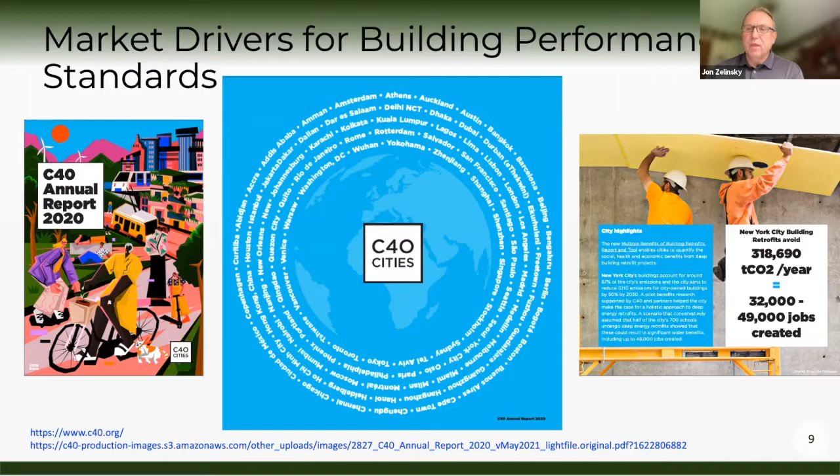So we start talking a little bit more about the market drivers. If you look at the percentage of carbon emissions from our building stock here in the US, on average 40% of all greenhouse gases that we generate here in the United States comes from our buildings. But that's the average. If you look and drill down a little bit more, you can see in most of these major cities that the carbon emissions is much higher.

New York City, 70% is attributed to their commercial and residential buildings. Washington, D.C., 75%, Boston, 60%, Philadelphia, 62%, even San Francisco, in California, which has some of the most stringent energy code for quite a while, is at 56%.

So the buildings that we work in, the types of systems that we design, are not basically energy efficient. In fact, according to the US EPA, 30% of the energy in our buildings is just pure waste. So moving forward, it's about how do you start to reduce that to meet the end goal of reducing carbon emissions. Next slide.

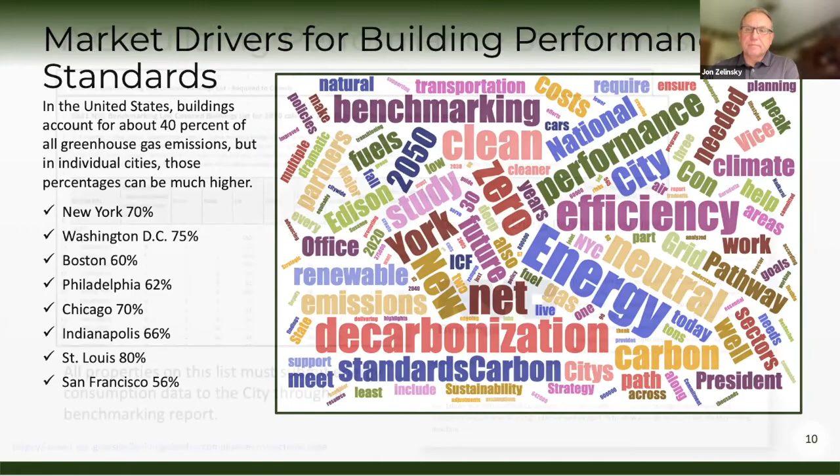So now we're going to talk a little bit here about the building emission standards. In New York City, they have a requirement now on the books where buildings greater than 25,000 square feet have to benchmark and report their energy consumption data. This is not about how much lighting or cooling they're using in the building. They have to report on an annual basis how much energy per square foot, getting into an energy usage intensity to understand what's happening.

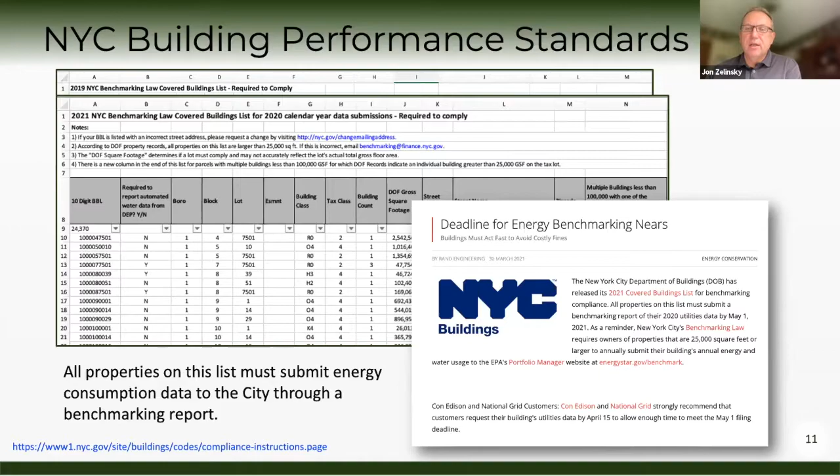And if you think about it, there are consequences to that, because in the world we live in today, this is kind of like public information, and with social media and everything else out there, non-compliance can actually come with a lot of operating risk, not only to your bottom line on your energy budget, but how do your customers feel about it? How does your board, your employees feel? What's really important is that having this public information can really damage somebody's reputation.

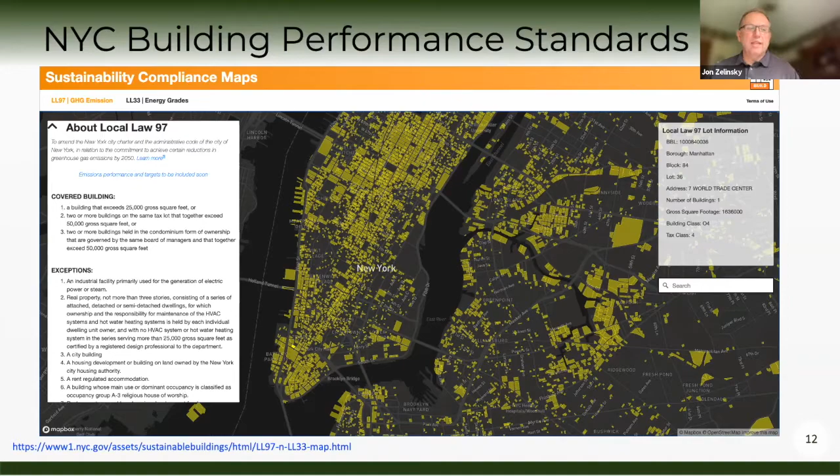Then beginning in 2030, that number reduces. Between now and 2050, which is the goal to get to an 80% reduction on the path to carbon neutrality, each one of these building owners is going to be required to reduce their overall energy consumption in their buildings. And it's not just the energy consumption, but where they get their energy from. If it's from renewables, fine, but anything emitting carbon emissions is going to be penalized.

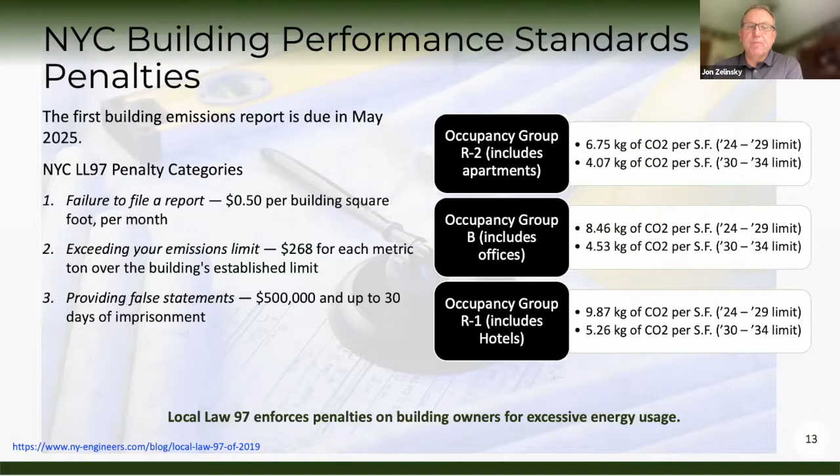Many of you are fully aware that lighting has become a reduced impact on energy consumption in a building. Most new lighting is now LEDs, exceeding 200 lumens per watt. With higher efficiency lighting, the overall percentage contributed to lighting in a building system has significantly reduced. It used to be 40% of a building's energy attributed to lighting, and that number is getting much smaller.

But the most significant, as you're probably aware, is the HVAC system. It's really cooling driven in that matter. But a lot of these buildings in places like New York and up north also have a lot of gas and oil heating and things like that, which are all measured and reported on.

Another area that is increasing significantly is plug load. When it comes to lighting, a lot of task lighting and things like that are now being put in these particular buildings, along with other things such as space heaters and everything else.

But why is it important that you are aware of this? It's because it has a real financial impact to the owner, not just in their operating cost, but with these building performance standards in place. Each one of these buildings is going to be on a fixed energy budget.

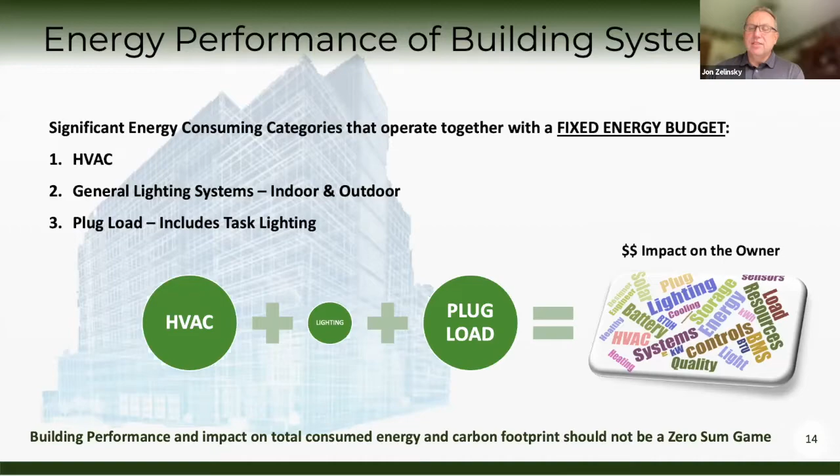But as we go to the next slide here, I'm going to give you some basic math. This is how a calculation is done when you're trying to figure out what your overall electric bill cost is. I'm not getting into details of distribution costs, just on a pure energy basis here.

What I use as an example here is a simple 12-watt downlight operating for 14 hours a day, 365 days a year, at 10 cents per kilowatt hour, uses 61.32 kilowatt hours per year. You can adjust that rate for whatever region of the country you're in. But at 10 cents, it costs that owner about $6.13 in energy consumption, which you might say is not very much.

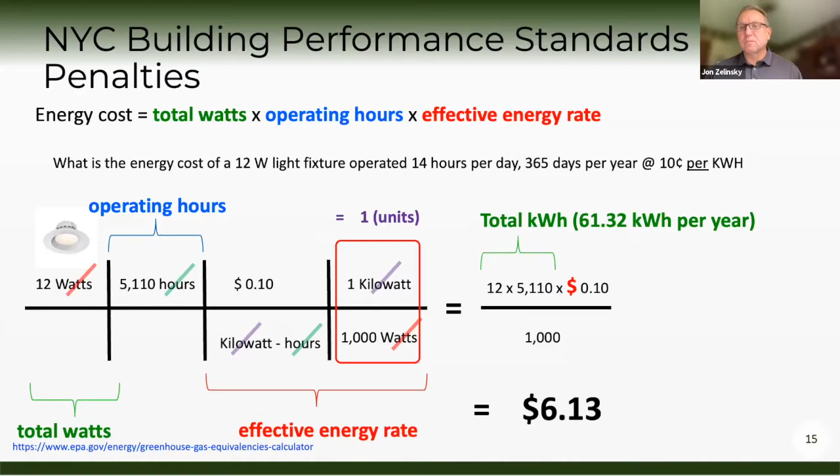But if you go to the next slide, now let's put that into context of carbon emissions. So 61.32 kilowatt hours of electricity in any given year equates to 0.043 metric tons. So how many of these light fixtures do you have in the space?

If the building owner is over their carbon emissions threshold, that individual light fixture can cost almost twice as much as the annual energy consumption of that particular fixture. So $6 to use in energy, and almost another $12 in financial penalties.

So by exceeding that particular limit, that's where having these buildings where you drive by and lights are on 24 hours a day, even when the building is not occupied, or spaces that are lit inappropriately because they're overlit, or there are too many fixtures, or there's no occupancy sensors, or someone has taped over a sensor or bypassed the controls, that's where these types of penalties now start to increase.

So up to twice as much a year is going to be hitting the owner's pocketbook just because of the contribution that lighting has. Now it might be the cooling system, it might be the plug load, it might be everything else that's throwing that particular building over that threshold. But to get to the true cost of what an owner is spending to operate that lighting system has a whole new complication to those calculations.

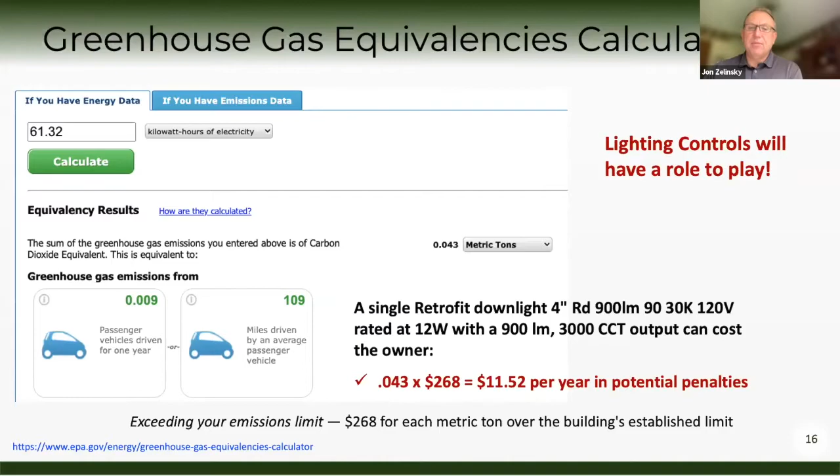So now let's start thinking about the building itself. I thought this was a good analogy because when I started my career as a consulting engineer, a lot of times the work you do in designs doesn't get noticed - because if you have good air quality and good light quality in a space, your occupants are happy. When occupants are happy, no one complains. They complain when there's something wrong with the lights, the air quality, when an office is stuffy, when things don't feel right. Having power over the types of designs really impacts a healthy building.

Especially with COVID, air quality has become front and center of what's supposed to happen in our buildings. Everyone's aware now that air quality has probably not been up to snuff in a lot of buildings. There's a lot of dining outside, we still haven't occupied a lot of buildings. You're talking about MERV filters and all these other things. The same conversations apply to lighting quality - circadian rhythms and everything else. Improving the overall environment of the building is critical for the health of occupants and the operations of the building.

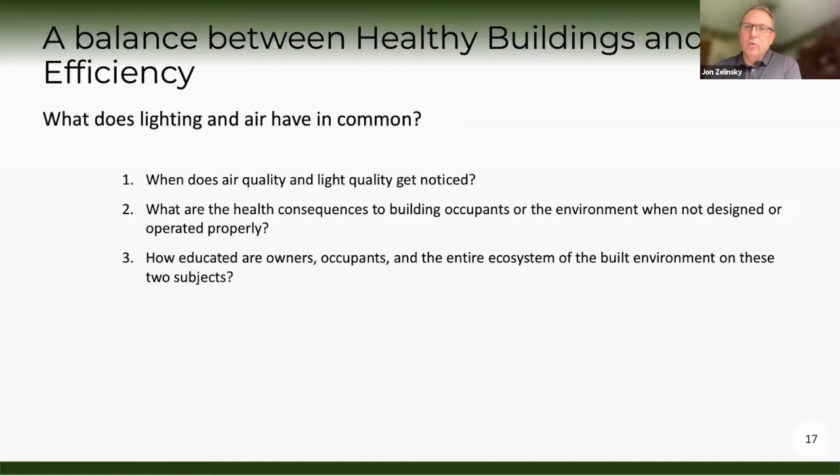Education is just lacking in our industry. And when it comes to building performance standards and what's on the table right now, that's where I think the lighting design community can have a voice.

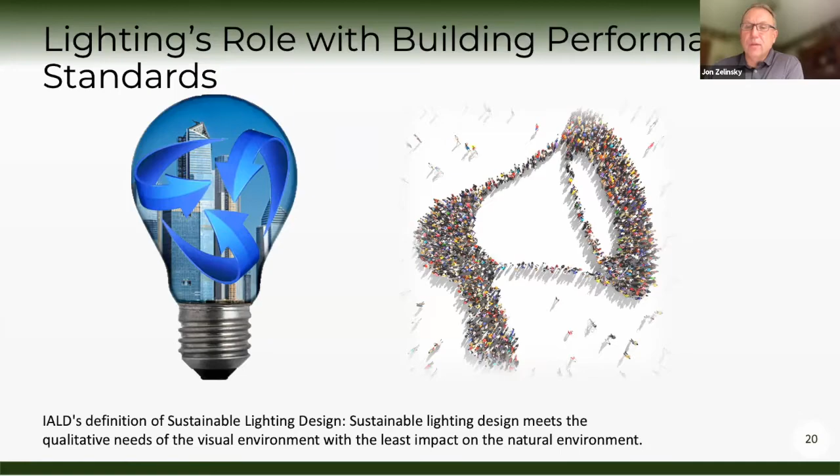So I took this slide from Konstantinos Papamichael. He's presented many times at IALD, and this is a combination of a couple of his slides that he used a couple of years ago when he was talking about code.

And in lighting, you want to have the right light at the right place and at the right time. I think that's even more important today moving forward than it was in the past, because having the right light, the right place at the right time, makes sure that you are energy efficient, that you are creating a healthy environment, and that the building occupant is doing exactly what they need to do in that given space. The only wild card in this is having the right light at the right time.

There might be a shift in how that building owner changes how they occupy that building, depending on the energy consumption requirements, whether you're using solar, battery powered, things like that. Because when it comes to lighting systems, I'll give you an example: if you have battery storage with renewable energy from solar and everything else, that battery storage is managing how that energy is being dispersed through that particular system.

So the lighting system is drawing a certain amount of power off of that particular device over a period of time. Being able to then manage and shift how power is consumed during those periods of the day is very important, and that's where lighting controls is really going to be important moving forward. It's not just a nice to have. I think it's going to be very essential to have lighting controls and those advanced data analytics to how that building performs over time.

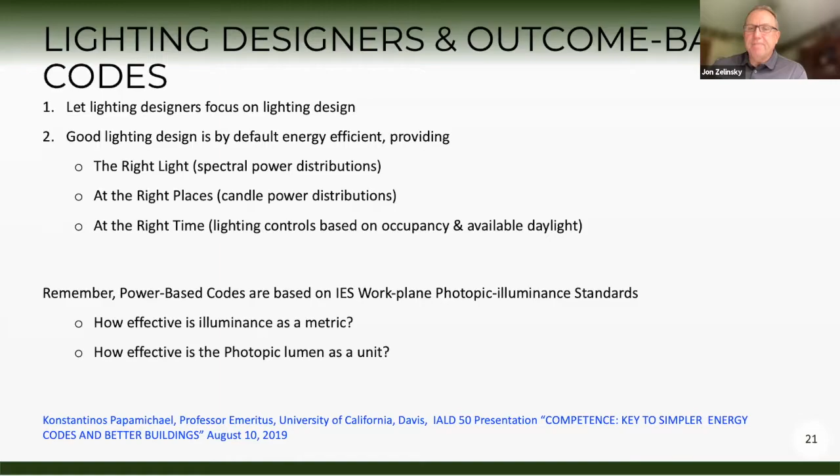So here we're talking a little bit more about what's in the headlines today. In the news, almost on a daily basis, you're actually reading something about climate change, whether it's wildfires in California, hurricanes, flooding, everything that's going on. Climate change is front and center. And if you look at the individual cities, if you look at the individual states, a lot of changes are starting to happen.

We talked a little bit about New York City and Local Law 97. Illinois and Chicago are starting to look at carbon emissions there as well. St. Louis has adopted a performance standard. The state of Colorado and up in Washington, things are starting to happen.

And we started off this presentation talking about the C40 cities. Again, the mayors and these committee members are actually exchanging information. They're talking about what works, and they're trying to drive those types of policy changes that are really going to reduce carbon emissions in those individual spaces.

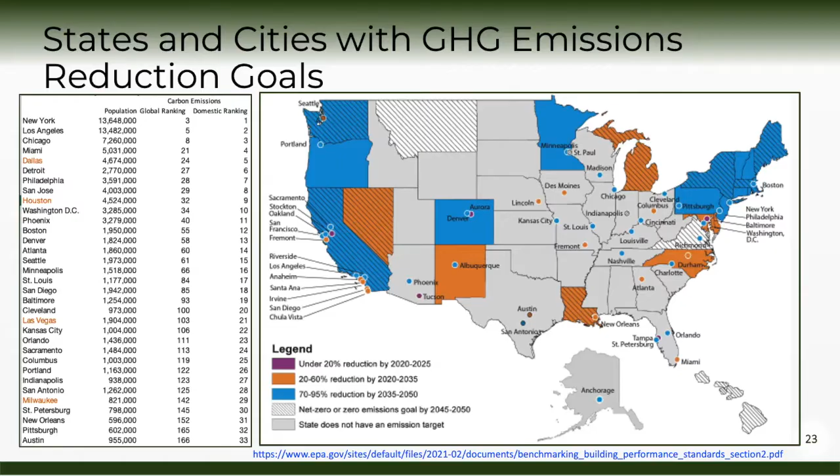Thank you, Jon. Really appreciate that, and providing insight into the market drivers and more context around building performance standards, what's coming, and how that's impacting different industries, specifically the lighting design community. Now I want to turn it over to Dima from CSE to dive a little deeper into what's happening with CEA's initiative around outcome-based code, and more specifically, what's happening here in California. So, Dima.

Thank you, Josh. I'm going to narrow the focus a little bit and talk about the outcome-based code and the California Energy Alliance's current efforts. Next slide.

Jon gave us a really good overview of things happening all across the states, but as I mentioned, we're going to focus now on just California. Next slide.

There's a lot of really good things happening in California. Of all the states, it has one of the most stringent lighting code requirements. And just a few years ago, AB802 passed, which is a statewide benchmarking ordinance requiring benchmarking for buildings 50,000 square feet or greater.

And across smaller jurisdictions, at the city level, we're seeing more and more building performance standards. It's essentially taking benchmarking one step further, as Jon explained, and actually requiring further action to hold building owners accountable for their building's energy performance. Next slide.